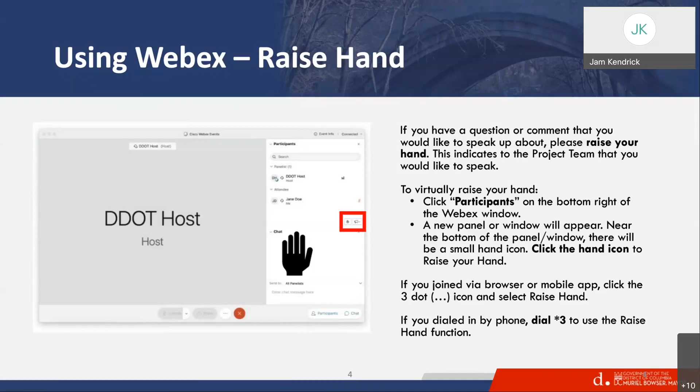We will begin tonight. I want to bring this to your attention: this is the kickoff meeting for the construction project. We've met with the community in the past during the concept phase and the design phase, and tonight we're happy to bring the construction project.

Our agenda will begin with a brief introduction. We'll have opening remarks and welcome the community partners. We'll go over the project overview and project objective, followed by maintenance of traffic, and then we'll open it up for question and answers. We'll also have the Title VI survey questionnaire at the end, and then we'll provide our contact information once the meeting ends.

I'll turn this over to Omid Ghaemi. He's the project manager for DDOT. Good evening, everyone. Welcome to the pre-construction public meeting for rehabilitation of 16th Street Bridge over Piney Branch Parkway project, bridge number 22, and thank you for your participation. I am Omid Ghaemi, project manager for this project. I want to introduce the rest of our team: Miss Zara Doriz, program manager for team 2 DDOT, Ward 3 and 4; Miss Nanette Bowles, resident engineer of 16th Street project; and our construction consultant team, Rob Lancaster, senior project lead, Vincent Kumordzie, resident engineer, Andrew Lee, construction manager, and Miss Jam Kendrick, public outreach.

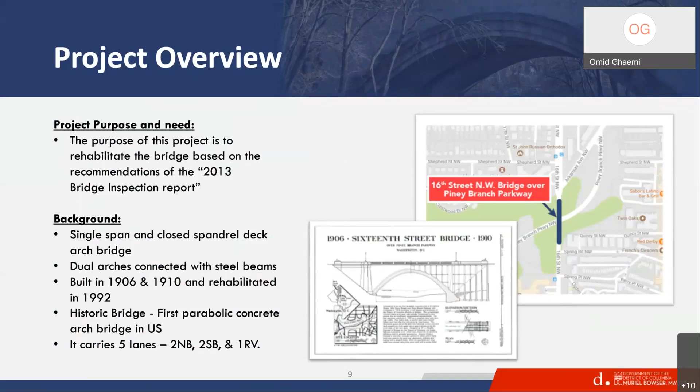The rehabilitation of the project has been designed to implement improvements for safety. We have a replacement pedestrian fence, abutment slope improvement, replacement of the northwest approach guardrail, upgraded bridge lighting, and traffic signal upgrades. For bridge rehab improvement, we have concrete repairs including deck replacement, sculpture restoration, and addition of a stormwater management biofiltration planter.

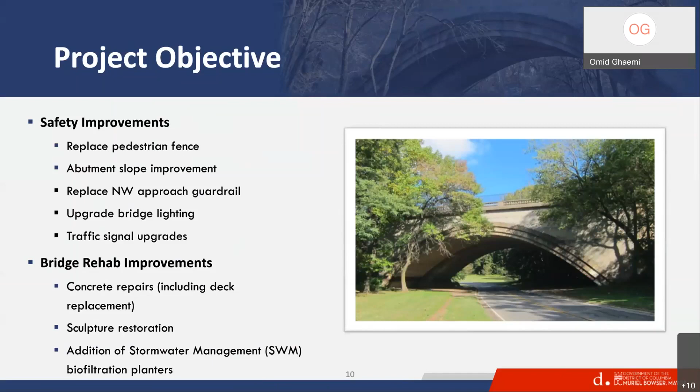We're going to go into a bit more detail on some of the features Omid just introduced, starting with the safety features. As part of this rehabilitation project, one visible safety feature will be the replacement of the existing 8-foot high bridge fencing, which was installed prior to the 1992 rehabilitation.

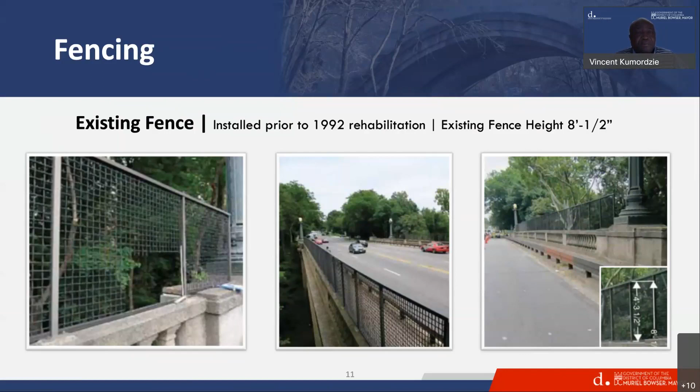We will be replacing that old fencing with a new, safer, taller 9-foot DDOT standard fence, and it will look something like this when it's all done.

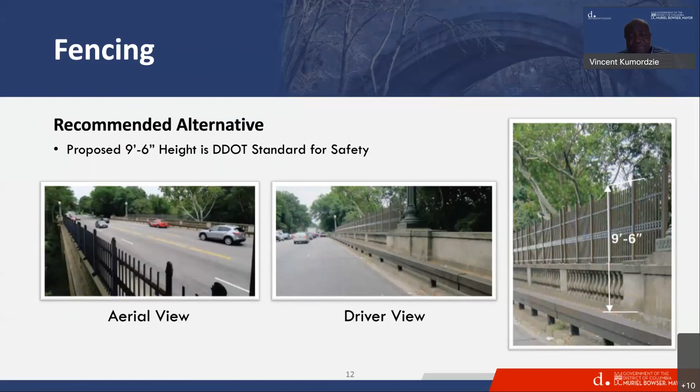Still talking about safety improvement features, the next is bridge lighting and traffic signal upgrades. The existing bridge lighting was installed after the 1992 rehabilitation program. This rehabilitation project is going to rehabilitate these bridge lighting features by sandblasting, cleaning, and repainting the fixtures.

Additionally, there will be conversion of the existing lights to LED, facilitated by installation of a retrofit kit, consistent with the LED street light upgrades along the 16th Street corridor. Another safety feature undertaken by this project is the traffic signal upgrades at 16th Street and its intersections with Shepherd Street and Arkansas Avenue.

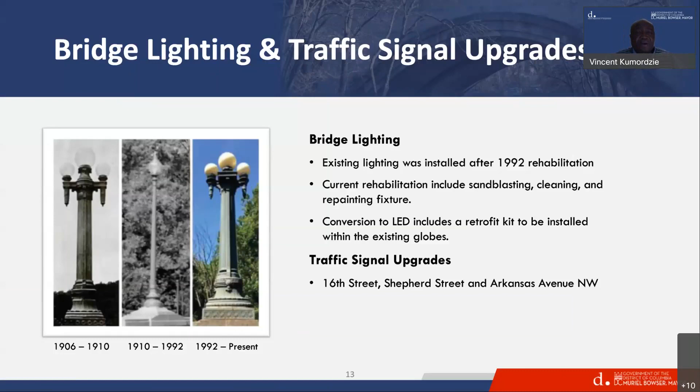Those of you who have had a chance to look at the slope up close will realize it has undergone significant areas of erosion, exposed tree roots, and vegetative undergrowth.

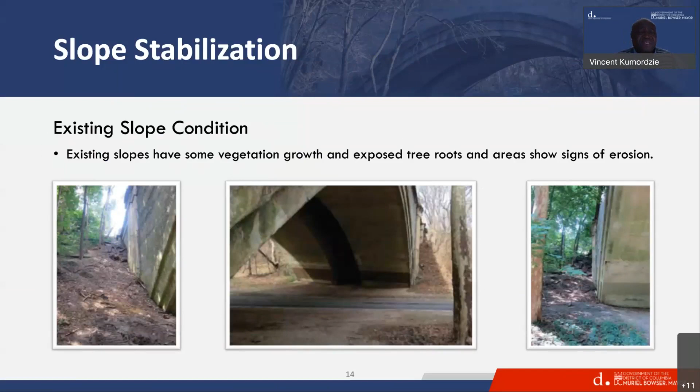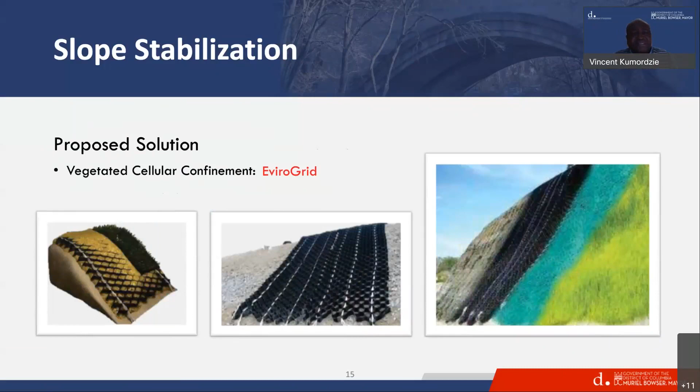We are going to fix this by implementing a slope stabilization mechanism that consists of a vegetated cellular confinement system called EviroGrid. This will require a little excavation to anchor the system. When finished, it will look something like you see on the screen.

Omid just introduced this bridge, which is a concrete bridge, so concrete repairs constitute the major part of the work we're undertaking. There will be different types of repairs like patching, removal of patches and patching back, crack repairs, and repointing of concrete joints. This will address concrete defects on key bridge elements like the railing posts and light pole bases.

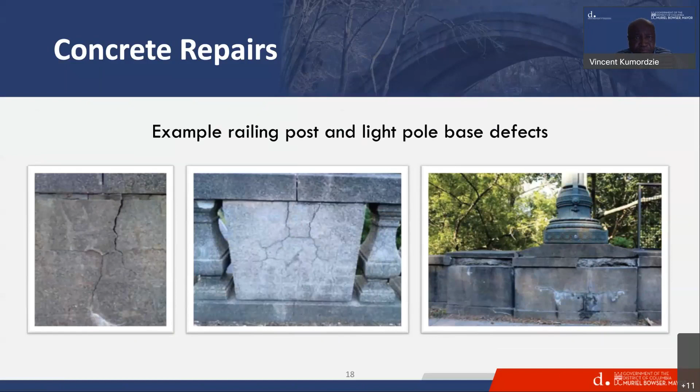Defects on balusters and major features like the bridge spandrel walls, the main arches on the exterior, and the columns and struts in the interior that hold the deck. Andre will talk about the deck repair shortly. Additional bridge features with defects to be addressed include the curb, railing, and statue pedestals.

There will also be replacement of coping and balusters as part of this rehabilitation project. Given that this whole program is geared towards historic restoration of these bridge elements, specific contract requirements must be followed by the contractor in cleaning the bridge surfaces and matching the color, aggregate shape, and texture of patches.

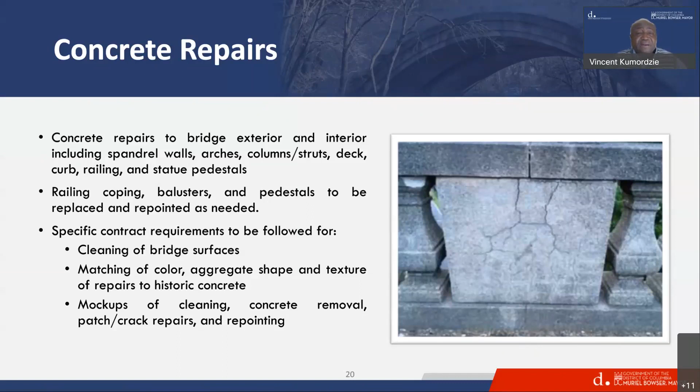This will be facilitated through trials and mock-ups of the very items we'll be doing, like cleaning the bridge surfaces, concrete removal, patch and crack repairs, and coping repointing.

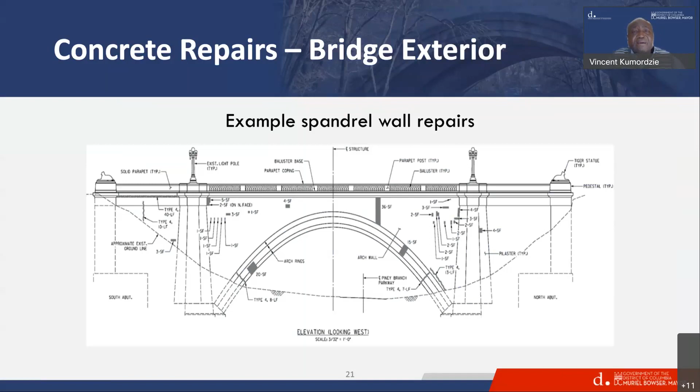We'll continue with some of the improvements that we'll make as part of this bridge rehab project. I'm sure those who live in the communities are aware of the historic statues and sculptures at the front of the bridge. We'll be cleaning the sculptures, applying protective wax coating, and continuing to ensure that these bronze tigers remain a visible feature of the bridge.

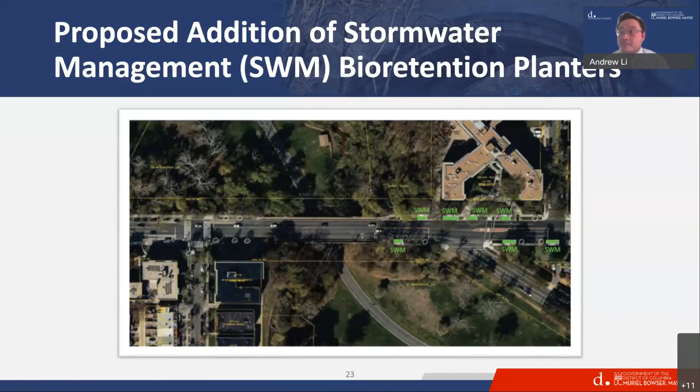Vincent mentioned a little bit about the concrete repairs, a lot of concrete patches on the spandrel walls of the arch bridge, as well as on the balusters on the concrete sidewalk. But the major component of this bridge rehab structure is the replacement of the existing concrete deck with a new latex modified concrete deck.

For those that have been out on the bridge, you may wonder why we're replacing the deck. There's been a new HMA overlay, however, if you take a look at some of these pictures, the deck's in not great condition. There's a lot of spalling and exposed rebars in these pictures underneath the deck. For that reason, to maintain the structural integrity of the bridge and ensure it stands for many more years, we need to replace the concrete deck for the safety of the public travelers.

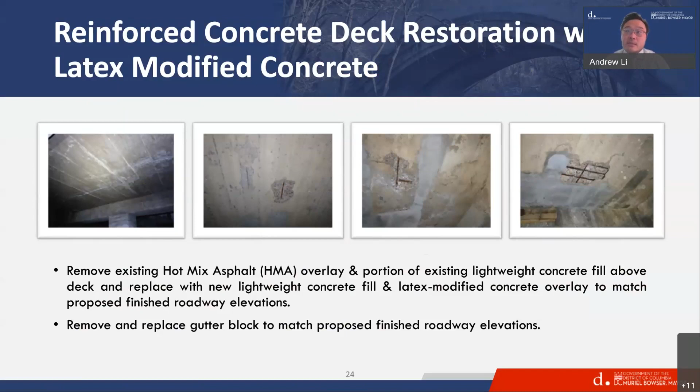We'll be removing the existing HMA hot mix asphalt overlay and replacing it with a new latex modified concrete overlay to match the proposed finished roadway elevations.

Unfortunately, whenever we perform an operation such as deck removal, anticipate significant traffic disruptions, as in order for us to replace the concrete deck, we'll have to take a couple lanes and allow the contractor to replace the deck one stage at a time.

The existing bridge right now has 5 lanes: 2 northbound, 2 southbound, and 1 reversible. As part of the deck replacement, we will be taking 2 travel lanes, which will be closed for the entirety of the deck restoration, and opening 3 lanes: 1 southbound, 1 northbound, and 1 reversible to the traveling public. We will allow the reversible lane to accommodate morning peak, with a lot of folks coming into DC, so that's 2 southbound lanes, and at all other times it will be 2 northbound lanes heading out of the district.

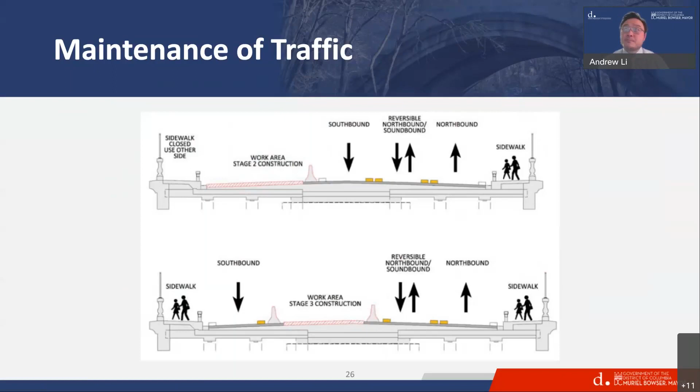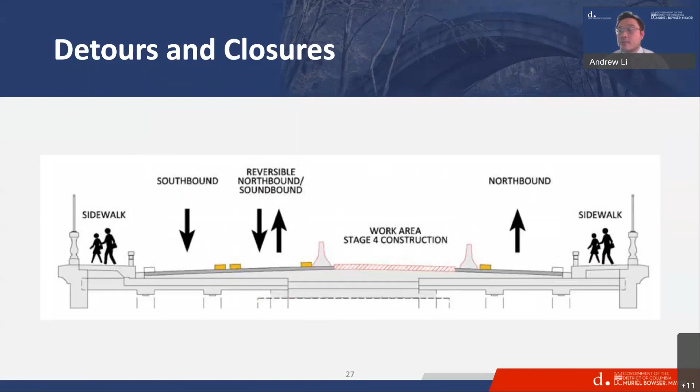Lastly, we'll capture the last remaining bit on the bridge through Stage 4. We'll have 1 dedicated northbound lane on the right side, and 2 lanes, 1 southbound and 1 reversible, on the left side. Both sidewalks will remain, and during this stage we'll complete the final segment of the concrete deck restoration.

So again, in order for us to perform this operation, there will be a significant traffic disruption and reduction in travel lanes from the current 5 to 3. This is necessary to install the concrete deck and maintain safety as well as structural integrity of the bridge.

The public is reminded and recommended to seek alternate routes on Georgia Avenue, Connecticut Avenue, as well as Beach Drive, entering and exiting the District of Columbia. In addition, this bridge crosses Piney Branch Parkway, and as Vincent mentioned earlier, we will also be making some small concrete patches on the spandrel walls of the concrete arches.

In instances like that, we will have to temporarily close lanes along Piney Branch. It will not be a full lane closure, but a single lane closure with flagging operations. So be cognizant of the potential activities on Piney Branch Parkway as well.

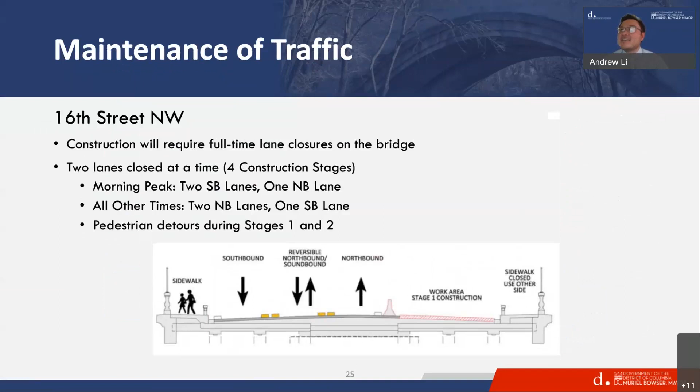I thought they were lions. I agree, they look like lions. Can you pull up the slide? Are there 4 of them? Yes, 2 on each side—2 on the south side and 2 on the north side. He looks like king of the jungle, a lion.

That's a lion. Well, we have a panelist and an attendee who said they are tigers, well documented. They are indeed tigers. Oh yeah, you're right.

Jam, there's another question that popped up about the guardrail slide. Let's see. I just saw a note that says the Library of Congress refers to them as lions. If you look at the Q&A, there's a question about the guardrail replacing the chain-link fence. I am looking and I don't see it, so give me just a moment.

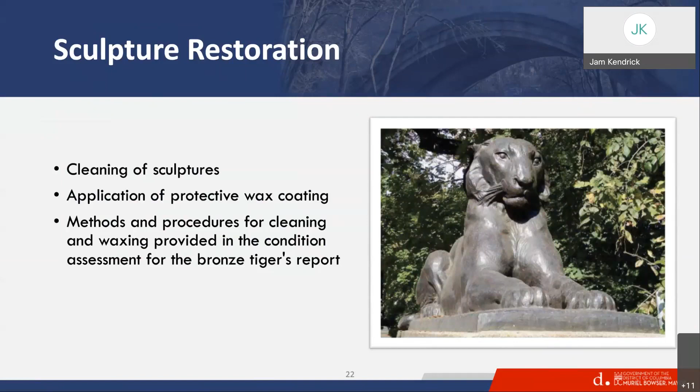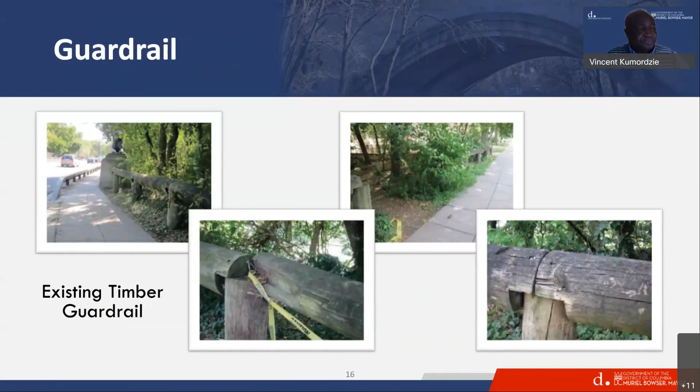Oh, I see. Can you show the slide of the new guardrails replacing the chain-link fence? This is it. This is the existing one. And the slide after this one is the proposed replacement. I'm thinking, is this the screen or slide that they're referencing? Yes.

There is a sample of this type of guardrail in the Rock Creek area, in the Rose Park ramp. Just a few months ago, DDOT did improvement in that area and installed this type of guardrail. If a resident wants to see the proposed design, you are welcome to visit Rose Park. Thank you so much—so you're saying there's a sample of this guardrail in the park? We have done similar improvements in other projects. Okay, very good, thank you.

I am still looking to see if there are any additional questions. We'll give it a few more minutes, or maybe another minute or so, just in case there are any lingering questions before we close out the meeting.

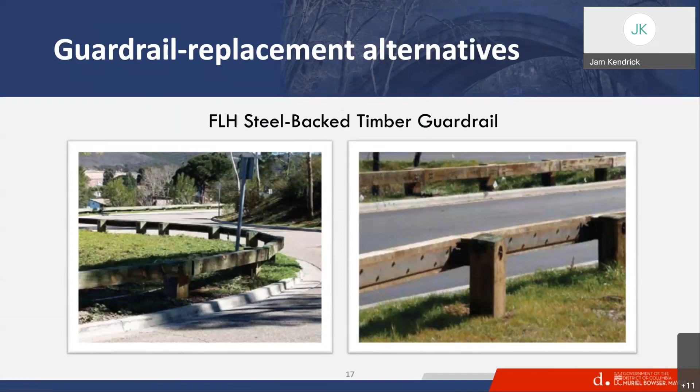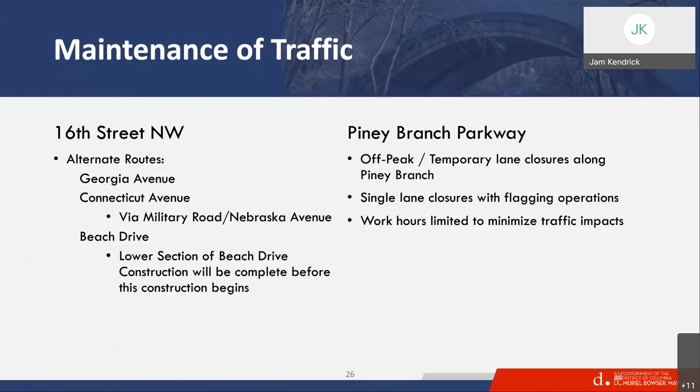Jam, there's obviously a lot of questions about traffic from a holistic perspective, not just for this project but other projects in the vicinity. I think you should mention, as we close out, the ways for folks to keep in touch with DDOT and submit any questions related to traffic. I would definitely do that.

There's one other question: when will the completion ceremony be in 2023? Yes, according to the plan, that would be November 2023. So you're saying there will be a ceremony, a completion ceremony? Yes, for most DDOT projects we invite residents to a completion ceremony. Thank you.